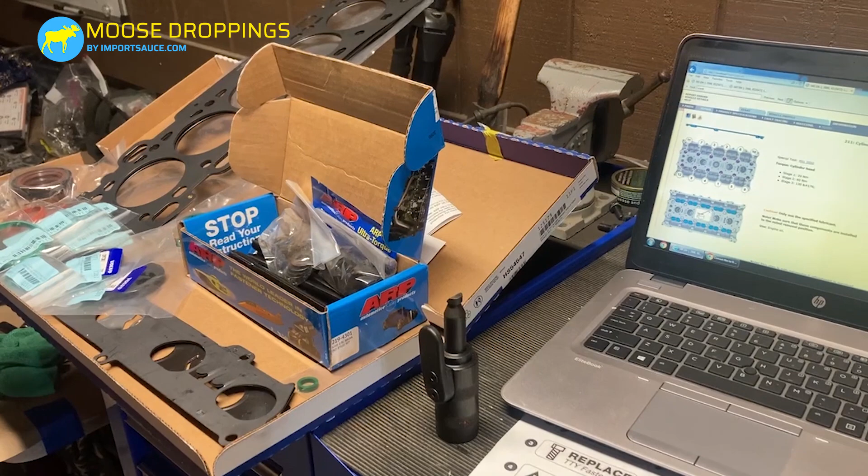It is now time for the cylinder head. Quick overview here: I have the procedure up, torque specs, and torquing sequence. We have the difference between Volvo and ARP, which we'll be using, plus the head gasket kit, which includes everything.

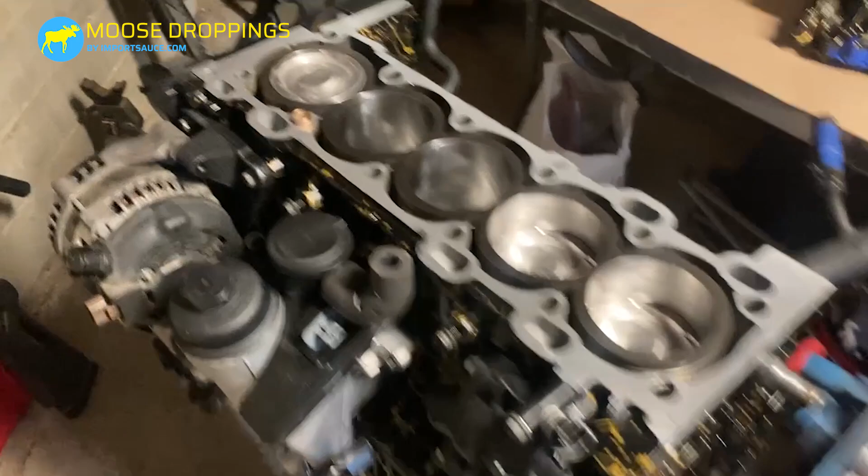So we're going to start off with this guy, which is going to go there, and this is going to flip over on top of it. Right now, since this is going to get closed in and we won't have much visibility down there on timing marks, we'll talk a whole bunch about timing later.

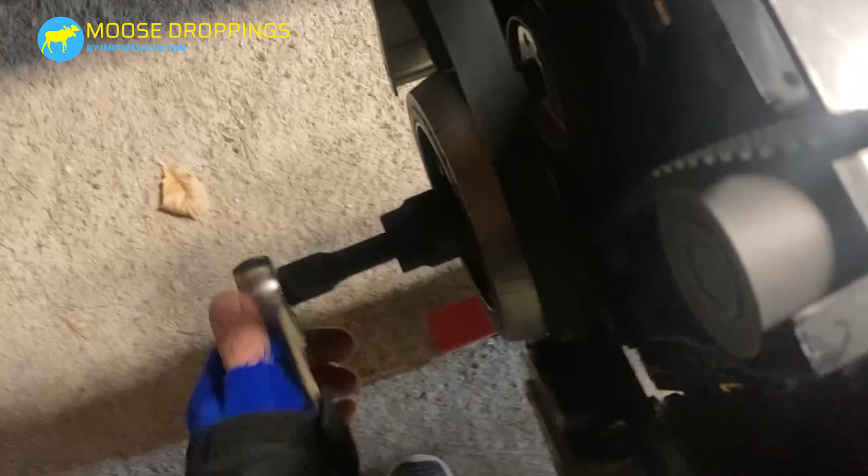But we are going to install the crank lock tool to make sure we are locked in at top dead center. So here's the tool. Easily enough, there is a little plug, and it comes right here. Open that up, slide this guy in, and then at that point try and turn the crank, get this seated up here, it locks.

Let me show you. It only locks one way, which is fine. If I'm going clockwise, it's going to move, but if I'm going counterclockwise, it will find it, and there it is—you'll hear it over on around cylinder 5 hit, and you know your top dead center. If you look down at your marks, I'll show you those later, you'll see those are lined up. We're just going to leave that tool in for now, and know we're getting close to timing, so let's keep it at top dead center.

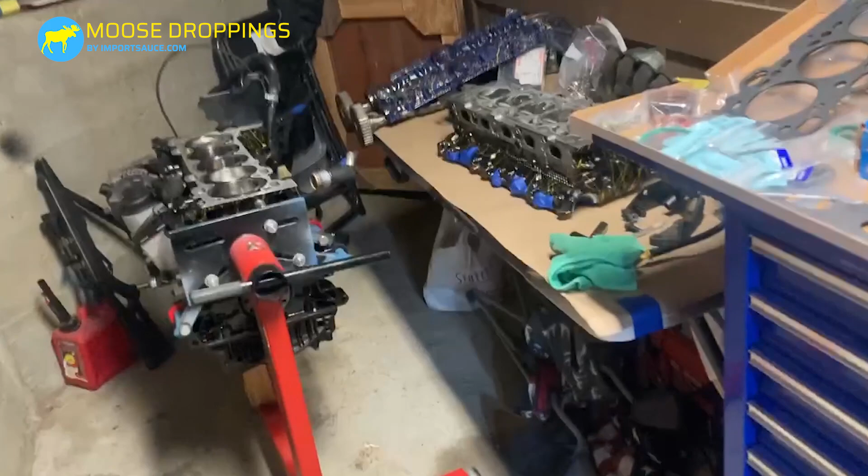Starting off, the surface has been cleaned and dried. The head gasket is going to go on. There is no sealant used on these, even on the box or the instructions—it's a dry install. Even Volvo says that too, not to use anything. Easily enough, when you look, make sure you see one that says 'top,' so that's facing the correct way.

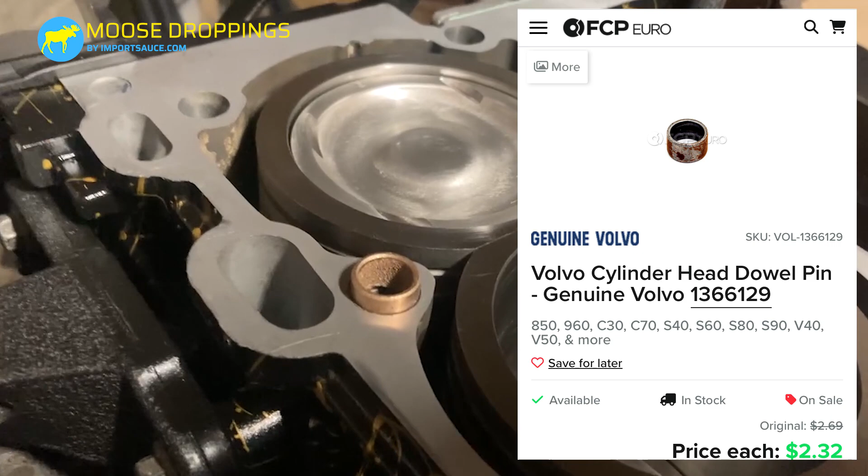One important note, we had to go source these locally. There are 2 guide pin or guide collar sleeves—one there, one here. When it came back from machining, we didn't have those, so we have new ones. We went down to the local parts store and they had some. Really that's to hold the gasket in place, right?

So theoretically at this point, we're ready for it. Make sure top is up, and it only goes one way. Everything is going to line up with the flow holes that you have. Then when I flip it over, the other one will seat into there. So we're going to flip this over on there, and I guess we're just going to get to torquing, right?

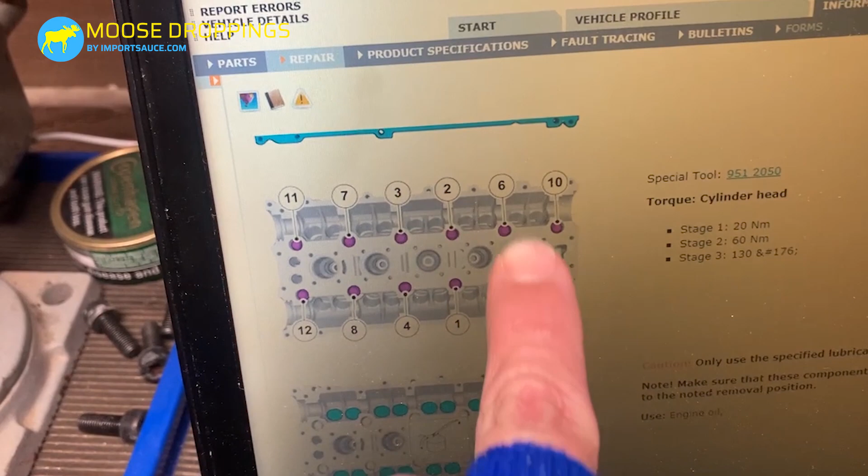Volvo or ARP says, hey, go ahead and just use the Volvo spec or sequence, and easily enough it's just kind of a circle: 1, 2, 3, 4, 5, 6, 7, 8, just like a big spiral all the way around. But it's going to be 3 steps. Stage 1, 20 Newton meters, which is about 15 foot-pounds. Stage 2, 60 Newton meters, 44 foot-pounds. Stage 3, 130 degrees.

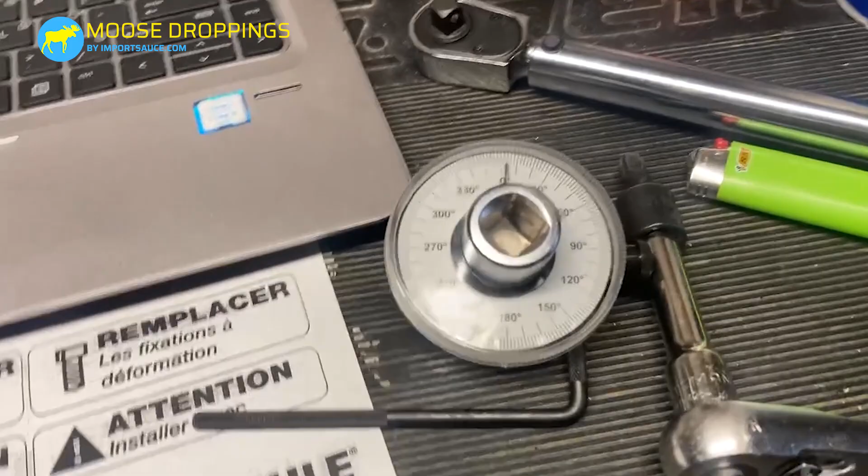So Volvo bolts are torque to yield. When we were doing the connecting rod bolts, you saw us using this tool, and that's how you would get to 130 degrees. 130 degrees is quite a bit. I remember when we did the head gasket a couple years back, it's scary getting that far up because you are waiting for that bolt to snap. It just feels like it.

But we're using ARP, so their sequence is simply, hey, just do it in 3 phases and make sure you end at 105 foot-pounds, easily enough. So probably what we'll do is 15, 44, and then take it up to 105.

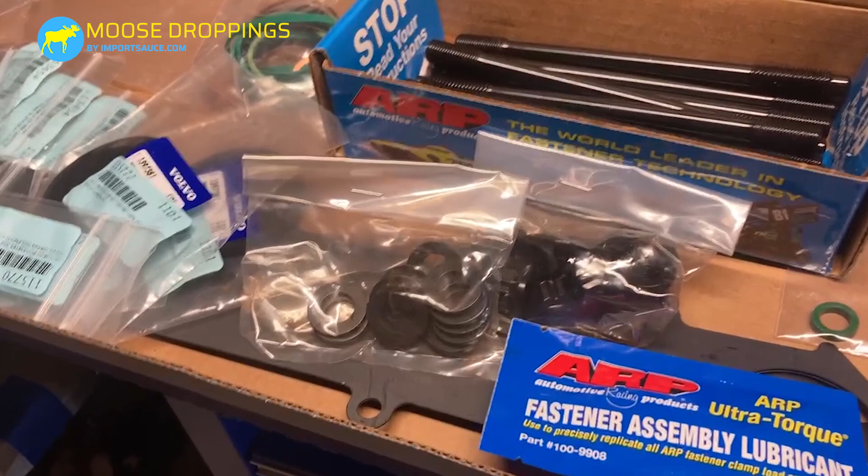Same thing—we're going to start first by threading these just like you saw on the block and the bedplate. We're going to make sure to put those in, clean them off, put them all in and out, just make sure there's no debris, and then wipe them down again. Then we will apply the fastener assembly lubrication, and hand tight with our Allen wrench to get those on. Then we'll drop the head on, and apply the goop on the washer, both sides, and on the nut as well, so we can get that going. Kind of a lot of steps, so we'll probably just give you some quick snippets as we go into it.

Step one, we went ahead and cleaned this bolt, and what we're doing is just threading it in, hand tight, making sure all those threads are good. Yep, perfect.

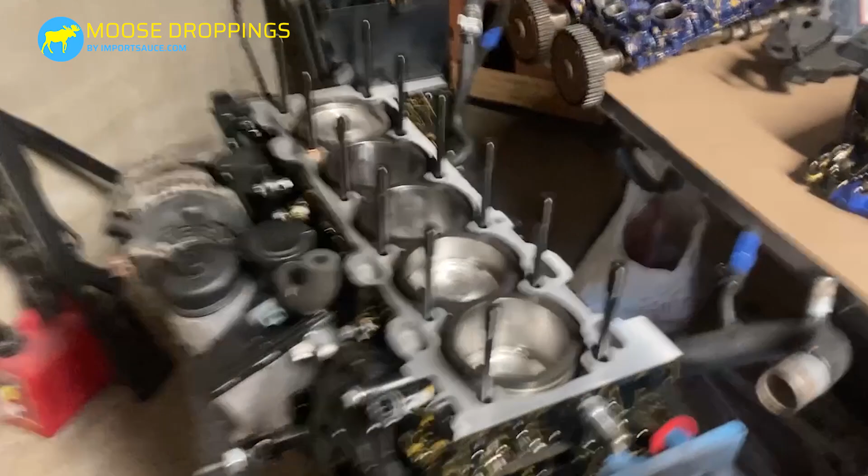All of those threaded down, everything looked good, came out, wiped all the bolts off, got all the debris from the cardboard box. Everything is hand tight with the 6mm Allen. Let's go ahead and start getting this guy down, right over those. Gotta kind of play with it a little bit. Let's go, guys.

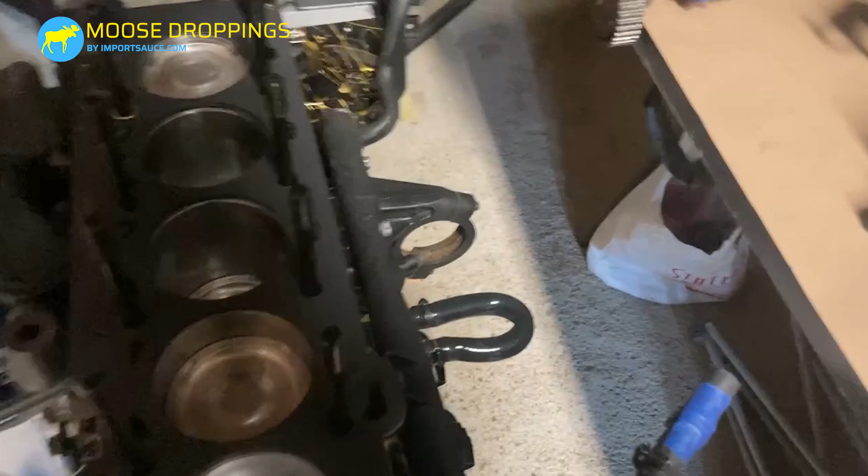There we are, okay, so that dropped on, guide pin, everything is good there. I may pull that guide pin out and put them back over here, just so that it doesn't shift that around. Really it's just to hold the gasket, and once that's in, this gasket should be perfect. So I'll do that, and then I'm going to pick up this head and flip it over and put it onto there. Okay, so that dropped in just right. Almost zero gap there, so we know that just the weight of it has pretty much gotten where it needs to be.

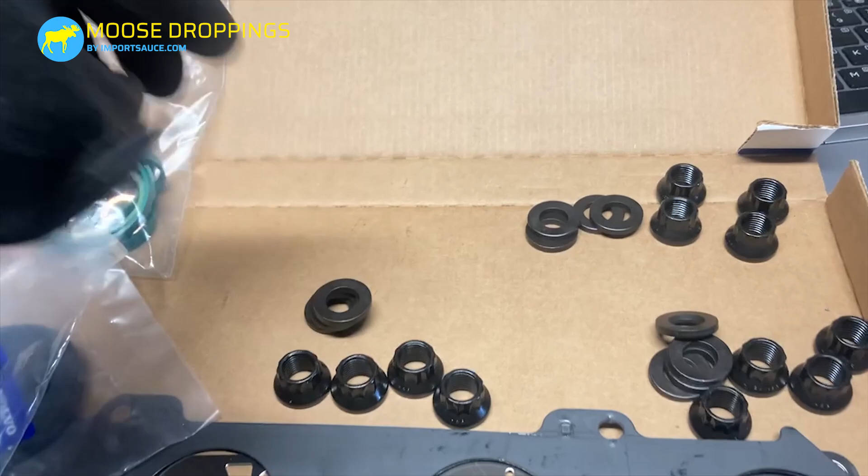The instructions are to lubricate the threads and lubricate each side of the washer and then put those in. This is gonna be a little difficult, right? Because the hole is a little tough. So luckily, pretty much everywhere there's a hole, there's some passages where we can try to get our finger in there and finagle and do what we have to seat that washer, and then also seat this. I didn't even look—that looks like a 14, oh sorry, 14, so 12 point.

So we're going to do that. We're going to lube inside threads. We'll get our finger and put a little, then wipe it in there to try to get some of the threads there as well, as it says, both sides of the washer. And then we will do hand tight on them, and here we will start the torque sequence as well. So after hand tight's done.

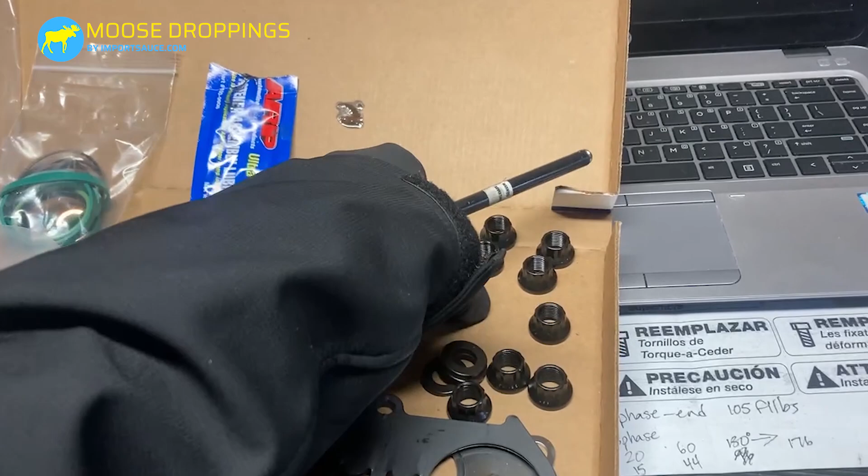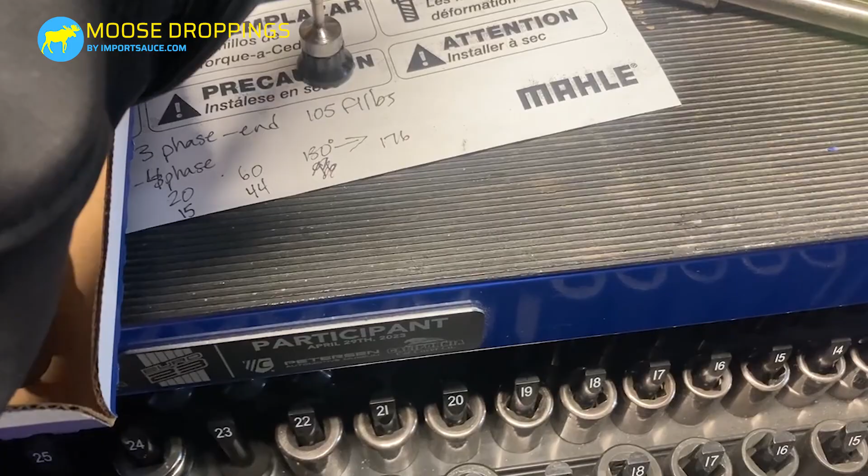What we found to work is after it's ready to go, you take a magnet, and then you can drop it down into the hole and just stick your finger through there and hold it in place. Same thing, after we lube up the nut, we would do the same thing, in which we would put it pretty much dead center, and we were able to drop this straight down, get a few turns, pull it up, and then stick the 14 mil down there and just go hand tight. So it's a slow and tedious process, but so has been this entire thing.

So that's kind of the best process. Lube everything up, and we were able to put a little bit on our fingers. For example, for this one here, we would just stick our finger down, and you can see, to rub some on the threads there. So we'll see you in a bit after we get all these suited up and ready for torque sequence.

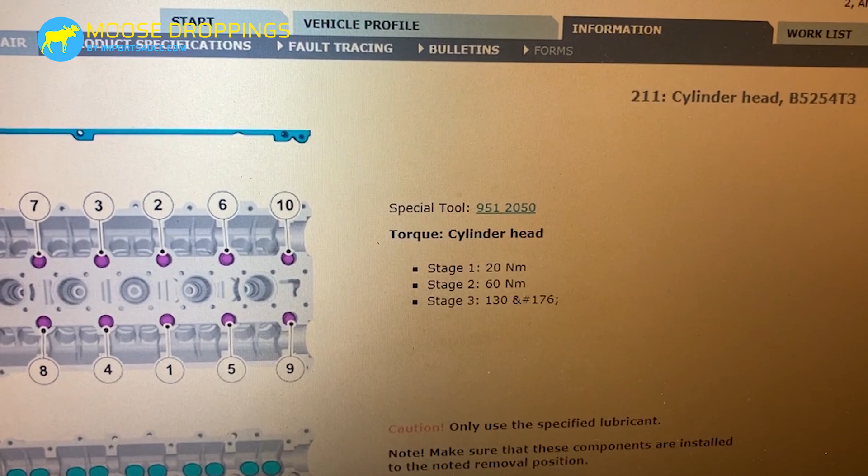It took about 30 minutes to get all those fished in, but we are ready now. Everything is hand tight, everything was lubed up. And again, the Volvo specs in tightening sequence, we're just gonna do the swirl around. If it was Volvo spec it'd be 20 Newton meters, 60 Newton meters, 130 degrees. But since we're doing ARP and they're not stretch bolts, we're going to go 25, 50, and end at 105. So we're gonna do 3 rounds of torque there, and then I guess we'll just let you know when it's done.

Okay, that is done. That was a workout.

105 is quite a bit. I had to brace the stand, and the thing was moving and grooving.

So we got it. What are we going to attack next? I don't know, there's not much left on the table. Maybe pull those tappets out, clean them one by one, get any debris out of there, and just start laying stuff in and seeing how it looks.

Every tappet was pulled. They were already numbered to keep them in order. The next thing, they were pulled out, wiped down of any dust they had, and then I did a little pre-oil with our Lucas Break-In Zinc Plus, just to get a good coat on there.

I'm going to go ahead and do a final wipe down across here, and then we're going to start looking at putting some of these gaskets in. Same as always, I'll put a little bit of oil, rub it around just so they're not going in dry, and I'll show you what gaskets go in and where they go.

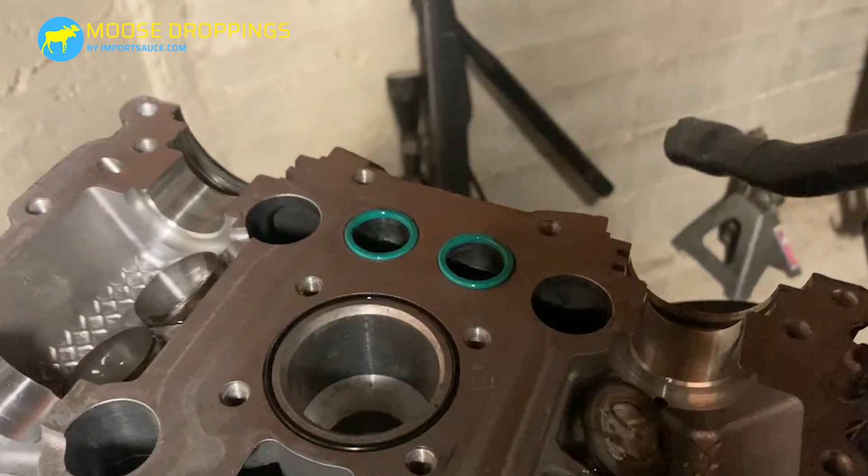Okay, so we were actually only able to load up 7 gaskets. It's going to be 1, 2, 3, 4, 5 - the little black guys around the spark plug housing where that's going to meet up. And then these 2 here, which are for the VVT. If you have a 2.4i, I don't think you need that - I think you just have 1 on there. And then what's left over, let's take a look and see.

We have 2 more VVTs, same gasket, but that's going to notch in there - VVT cam position sensors, right? So 2 more go in there.

And then we have 5 of those big orange guys - those are for the intake manifold, or the plenum as they call it, where it's going to meet up with the lower intake manifold. Then they gave us 1 big green one, which meets up from the throttle body to the intake manifold as well. A couple of crush washers - those are going to be for the turbo oil feeds, but because we got new hoses and upgraded elevate lines and all that, we have new crush washers already installed.

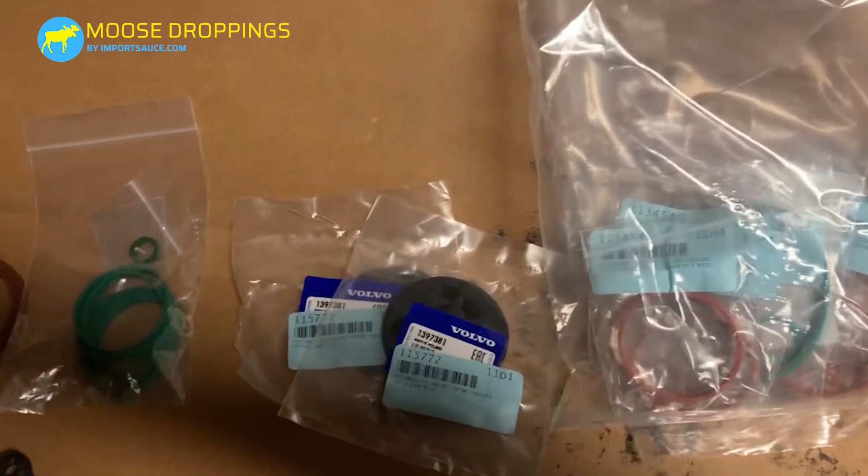So this is what we know we're going to use. Obviously, the 2 back caps, which are going to go here and seal the back of that. And for some reason, they sent us 2 different cam gear seals, right? So that's those guys right there, which will notch in here.

The black ones are a little bit smaller diameter, and these orange ones appear to be the ones we will use. We can take a close look because it has the part numbers on them. And obviously, one's smaller than the other.

So my thought is maybe this whole kit - it doesn't tell you what's in there, unless it's a Volvo part number, then you can look that up. But these guys are just in a bag. My guess is maybe the 2.4i uses the same kit with a smaller diameter, or just something. A lot of these aren't used.

I still have no idea what those extra guys are for. I don't see anywhere where they would go, which is not uncommon, because I know the last time we did the head gasket, we had a whole bunch of extra stuff after the fact. So we're just making sure and checking everything as we build it up. But essentially those gaskets are done.

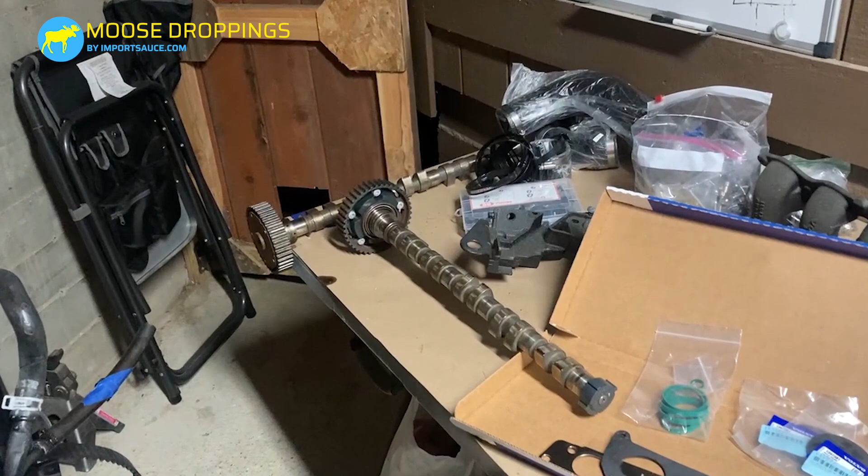So what we're going to do is wipe down the cam gears, and then we'll go ahead and put a little bit of oil on them. And we are going to install those new guys. We're actually going to be pulling the cam gears off to do some painting, but while it's off, this is really easy.

You can just slide them out. But we'll also show you the procedure when we pull the cam gears off, if there's access to do it there. Yeah, we're just going to pull these off, clean these up, and set them down.

Again, intake and exhaust are marked, and we've already pre-oiled, dropping a whole bunch on there on the top, just so that when we mate that and start crunching everything down, we're good to go.

Here is where we're at. We have both brand new seals on there after cleaning these, and then we just drizzle a whole bunch of oil on them, get them kind of juiced up, and we'll do that again right before we set this on.

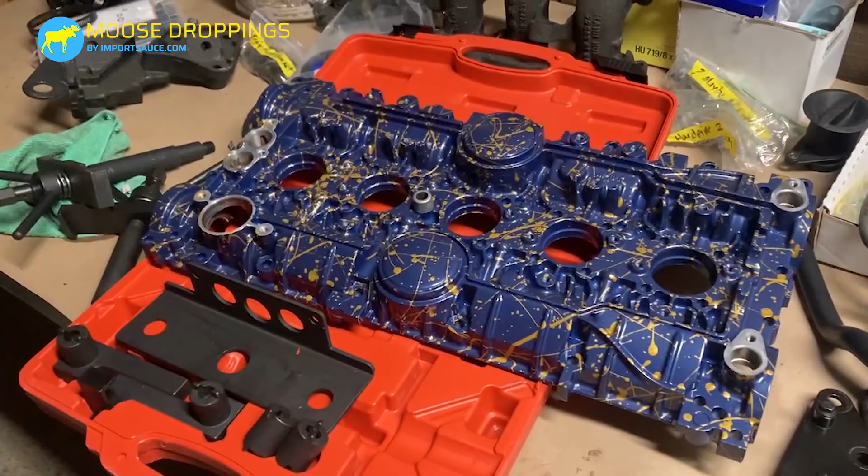We came over here and set the timing, and what we're going to do, if you've seen the notches, they're extremely small, so we've grinded those out so you can actually see them. This one we have not.

Let me get a flashlight. We marked it with red Sharpie, because we need to get another Dremel cutting bit, but it's so dang small, right? I mean, you can see it's just a teensy mark.

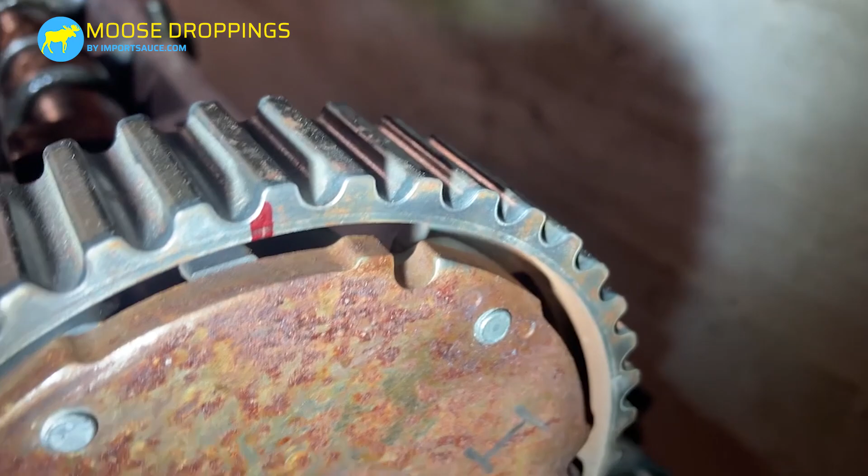And so we've set both of those almost to about 12 o'clock, right where they would be. We know the bottom is dialed in and locked in position. But obviously, we're going to do a whole section on the timing and show you everything there.

The next step is going to be pulling these out, getting them out of the way, and going ahead and getting our anaerobic sealer on this whole thing. Then we're going to put that on, and then we are going to use our timing cover clamping tool, which is going to evenly disperse the pressure and push that down, so that we can get our 46 M7 by 35s all on there.

There's no torque sequence on that, but as we saw in VIDA way back, if it doesn't say it, then we'll just start from the inside and work out. This process takes a very long time, 46 of those. And we're going to have to figure out how to be careful and not kind of eat into the paint, whether we should dab just a little bit of oil underneath the flange or what.

I don't think the torque is too high, maybe 12, 15 pounds. So that's not going to be too bad, but we don't want to start tearing up this paint. We've got a lot of clear on it, so hopefully that should mitigate that. But yeah, we'll pick up on that tomorrow, which is essentially pulling these out of the way, and then doing another final cleaning on the surface there.

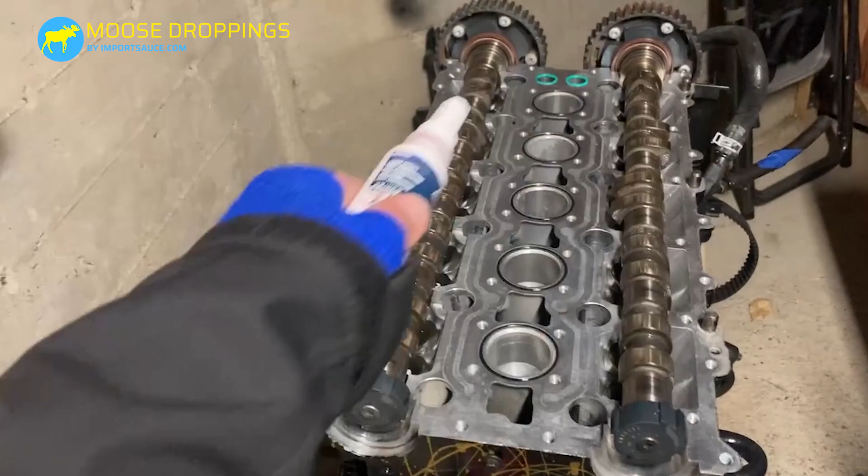And then at that point, get our Volvo anaerobic sealer all on there, get that cover on, clamp it down, and torque all 46 of those. And when we do that tomorrow, you will get to see some of the new Elevate hardware, titanium 12-point hardware that is used for this, which is going to include the 46 timing cover bolts, bolts for the oil filler.

Hardware that holds down the VVT, pretty much everything on here. Elevate has a brand new kit that came out in perfect timing for us. So we'll pick back up on that tomorrow, but for you, that'll just be about 3 seconds from now.

Don't know quite where we left off last night. I think the cam gears were on and oiled. We pulled them off just so that we can apply our Volvo anaerobic sealer.

For this one, I'm actually going to use the paintbrush or paint roller style method. For the oil pan, where it's just a single bead that goes around the outside, not a big deal. But considering this entire surface has to be covered, I do see the value in it. I did not do the Volvo special tool, I just got a regular paintbrush roller that we had.

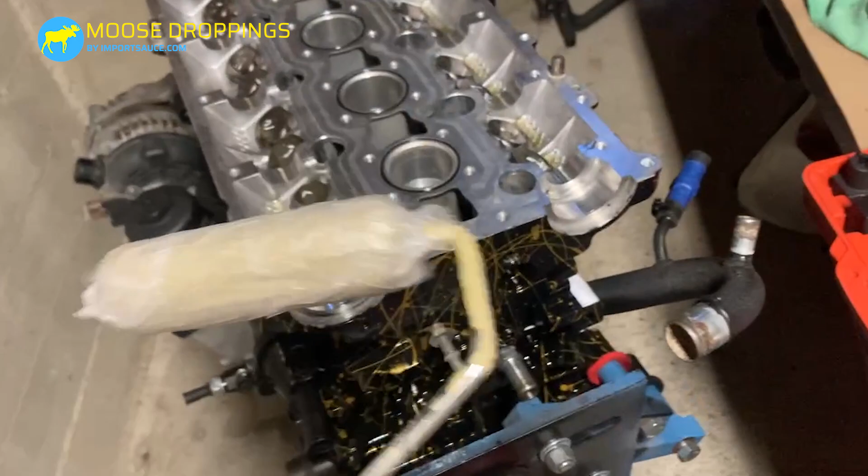Rather than using a regular painting brush, because we made this mistake with our head gasket years and years ago, when we rolled it, all of our sealer got sucked up into the brush and we barely had enough to squeeze out to make it seal. And these things are like 50 bucks a tube. So what I did is I wrapped it in just saran wrap, press and seal. That way it's going to roll it and evenly distribute it, but it's not going to soak up any of the product, to make sure as much of it stays on here as possible.

So we're going to give it a final wipe down, because you can see in certain areas, moving the cam gears around, we got a little bit of oil on there. We're going to leave those two gaskets in there. We could pull them out, but either way they're going to get juiced up. So, well, maybe we'll pull them out.

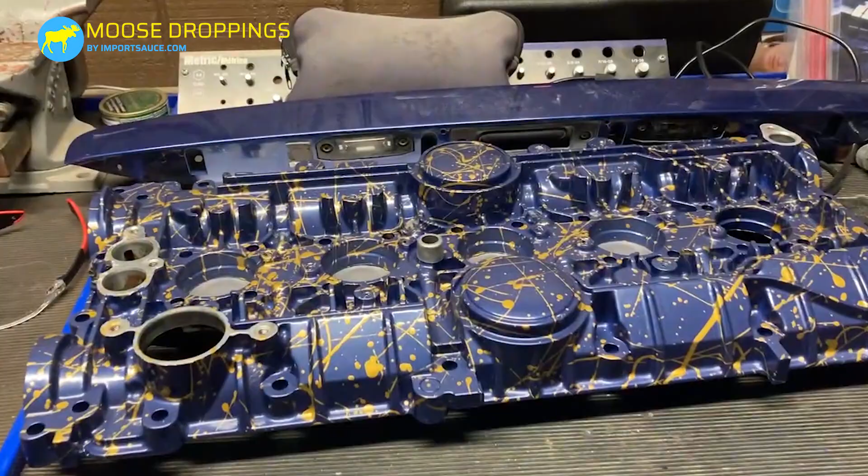We'll roll it on just so you can see that. We'll drop those back in, and then we'll drop this guy on. And then we've already kind of tested this out. This is the cam locking tool, but you can buy one for a little bit more that has these guys that will actually screw into 1 and 5 and clamp the whole thing down so that you can evenly get torque, and that way everything is completely, almost pretty much sealed on there.

And then you just go through and tighten everything. That is not necessary. When we did the head gasket, we did it without it, and we just started, as Volvo says, from the inside, working out, making sure everything is torqued, and that was enough to press it down as well. But this tool does it all at once and just kind of clamps it down.

It should be noted that once the timing cover is on, you can still turn the cam gears. But when we do set them back in, we'll make sure they're set as close to top dead center as we can eyeball it, just so they're in the right position. Then as we start clamping it out here, we will pop the two end caps in as well, so that when it clamps down, they're sandwiched in there nice and tight, rather than trying to pop them in after the fact.

Or actually, cancel that—we're not going to put them in, because when we do a whole timing segment and show you everything on timing, we want to show you some of the things that go on there, like how to use the cam locking tool, how to look for what you're looking for inside, and all of that. So those will go on later. Right now we'll clean this up and coat some sealer.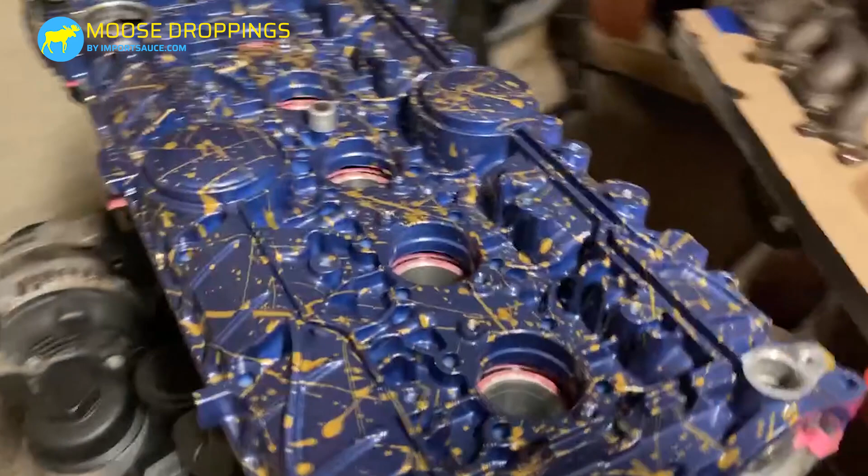What we're going to do now is get some old rags, because this is going to clamp down and we do not want it clamping down on our paint job. So we'll get some rags and start torquing that down. Even though the instructions in Volvo VIDA say cylinder 1 and 5, I've heard from a few other Volvo buddies who have done a lot of engine work, Volvo gurus out there, and they say go with cylinder 2 and 4.

It's going to disperse the clamp a little bit better, so we're going to show you what that looks like. Essentially, you'll turn this by hand and thread it down into the spark plug hole. Once it's there, you can go ahead and start spinning it, and that will bring everything together. We'll get some protection for our paint job and then get those suited up.

The clamp tool installed easily enough, and you can see it has sealed up all the gaps. All that pink showing is just where the timing cover is smaller than the head. Once we clamp everything down, we'll go ahead and wipe all that off so we don't have pink stuff there. We'll work quickly because it's kind of like glue—maybe after it dries we can razor blade it or something. But yeah, that thing just clamps everything down.

Now we're going to get our M7 by 35 millimeters, and this is the brand new Elevate titanium 12-point set we're featuring here. It just came up on their website, available for purchase. This is the kit you should buy if you are not using the plastic timing cover, which leaves all 46 bolts exposed, plus a few other cool ones in that Elevate bundle.

So here is the Elevate titanium M7 by 35 spec that goes over the entire timing cover. Let me show you on VIDA—if you're looking at the timing cover, all those little purple dots, 46 of them. And here they are, brand new titanium 12-point, exactly to Volvo spec, minus the fact that they are stronger, lighter, and look a heck of a lot better.

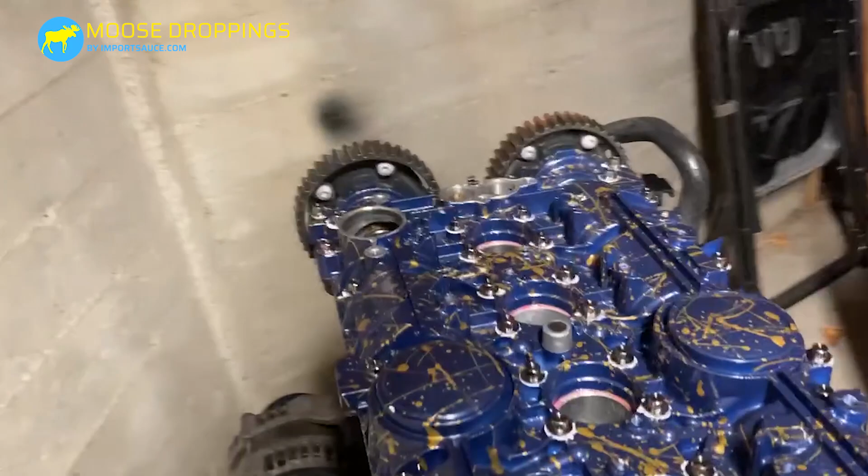I've been really excited to get to this step in the project so we can actually put these guys on. So we're going to suit these up. Here we are—all 46 are on there, the new Elevate titanium 12-points, looking good. Let's see if we can get a close up. Yep, so 46 of them.

One thing we did do is torque everything inside out. We could see everything juicing out, and we wiped that away, but you can see the juice there, and I did a quick check—yep, metal to metal, clean seam. You can't even barely see the seam there. I'll wipe a little more of that excess away, but a good sign is seeing it kind of juicing out as it sandwiched down, so you know it got a good mating.

We went ahead and stuck the spark plugs in just as we were working. I knew it was going to happen—I didn't know how to avoid it without buying bolts that have washers that spin on them. With the turning and torquing, we were going to lose some paint on our paint job. But the good thing is the base coat white primer that we used did hold.

And with the paint splatter, you can't really see it, right? So if you're looking, your eyes aren't drawn to it. We got lucky there. Spark plugs went in with lots of anti-seize on them, and the torque spec for that was 21.8 pounds—we just did 22.

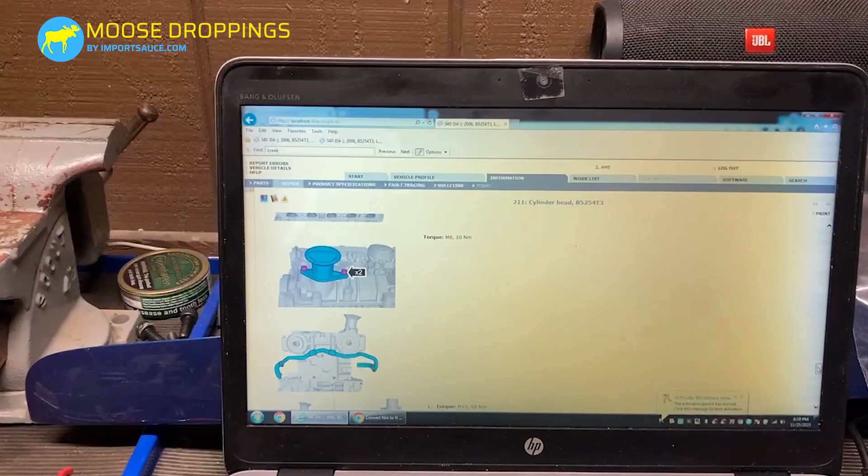The next thing we're going to do is just continue on. We were kind of doing our own thing, but we'll finish up everything VIDA says to do on the timing cover.

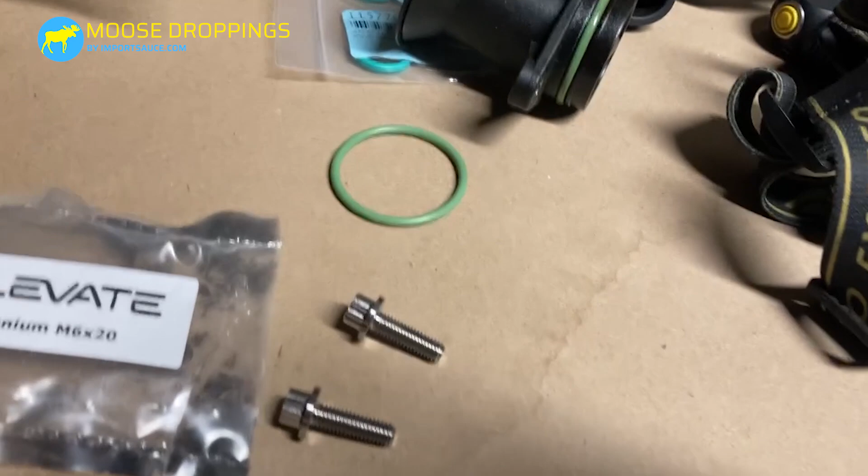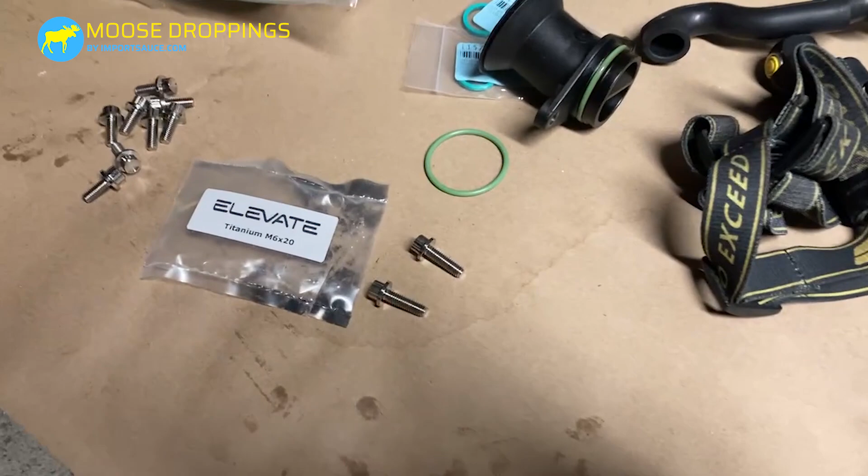So the next thing we're going to do is the oil filler cap, and there's a new rubber O-ring that came in our head kit. Just like the Elevate 12-points, the kit that's not using the plastic cover comes with two M6x20s that match, and those hold that down. Also, since we're not using the cover, there are 8 M6x15s which fill the holes where your plastic cover would bolt onto. So we're going to put the new O-ring on, clamp it down to 10 Newton meters, and then put our 8 plug holes in as well.

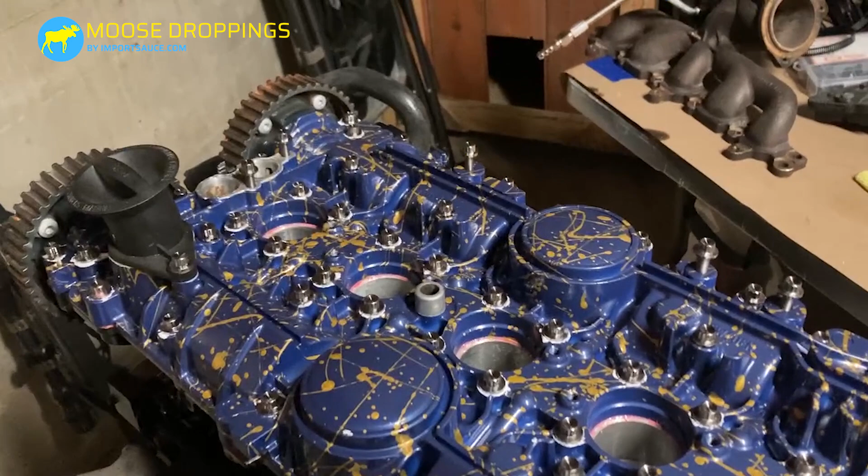I also forgot to mention, after we put those 8 cap fillers in, that the bundle you select for not using your timing cover also comes with a titanium 12-point replacement for pretty much every single hole on this, with the exception of 7 or 8, and we'll talk about that later on in the construction here.

But it comes with our 2 VVT bolts, it comes with our 2 cam position sensor bolts, and plugs for the 2-4 and some other variations. These holes are used for brackets and things of that nature, but it comes with things to plug that up as well. So really the only thing we do not see here with the brand new 12-point titanium from Elevate is going to be a few of the grounds, including the coil packs. And we know there's a ground there, and a couple in here for the wire harness mixed in with the coil pack bolts, so we'll talk about that later on. You definitely want to stick around and keep your ears peeled on what's going on there.

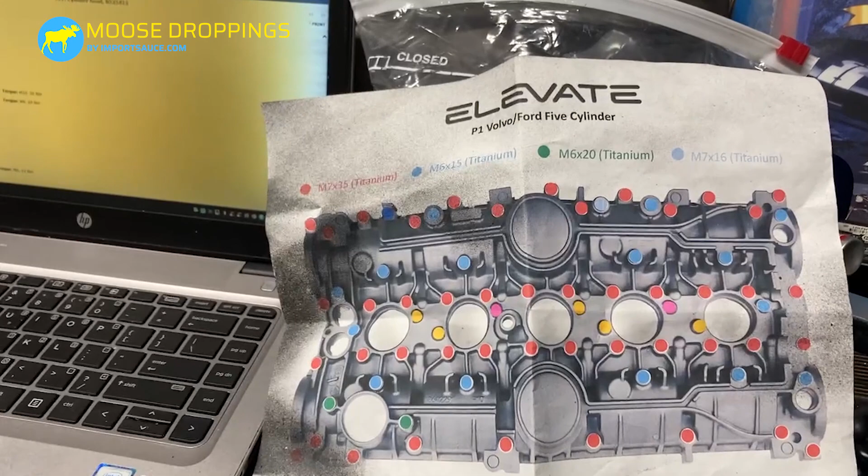Elevate comes with, as always, full color, color coordinated instructions, and it tells you here is what goes where, and here are the different sizes that you should be putting here and there.

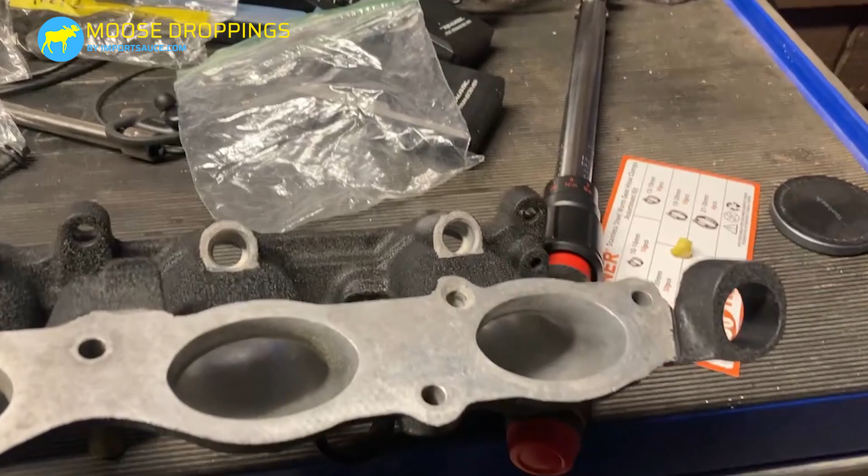Next, we are going to put the lower inlet manifold on. This is the Elevate lower inlet manifold, and it looks like a Volvo lower inlet manifold. That's because when you order yours, you send yours in for a core. We have a whole video on this, but they go ahead and do a nice shiny polish out, extraction of all that material in there, and get this thing ready for performance.

There are 2 gaskets that came in our head gasket kit. Easily enough, it's going to be the black one. This one is going to be for the exhaust manifold, so we'll just toss that over there. The holes only line up one way, so you'll figure that out pretty quickly. There are 6 M7 bolts, which means we are going to be at 12.5 foot-pounds of torque.

As soon as I put that on, fuel rail bolts, I am just going to drop those in where they go, which are just 2. 1, 2. Because the fuel rail is still attached to the fuel system in the vehicle.

But I did notice that I remember last time when I was tightening one that it was giving me some trouble, and it looks like it's because it's bent. So I'm going to see if I can track down a replacement. I'll just thread a few in there to keep it in place, but I'm going to put it on my notes to see if I can go get a replacement for that. That looks like an M6 something, so we'll see—the local parts store should have something for that.

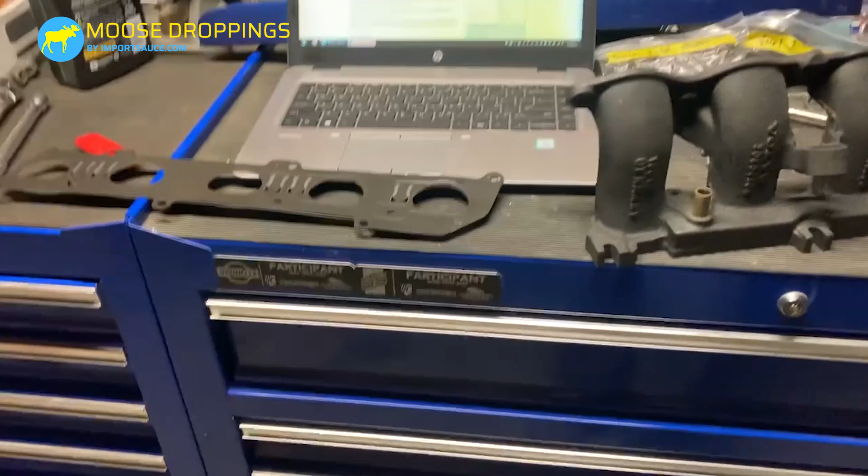So we're going to put that gasket on, and we will torque those 6 bolts to 12.5, and you'll see it here in a bit.

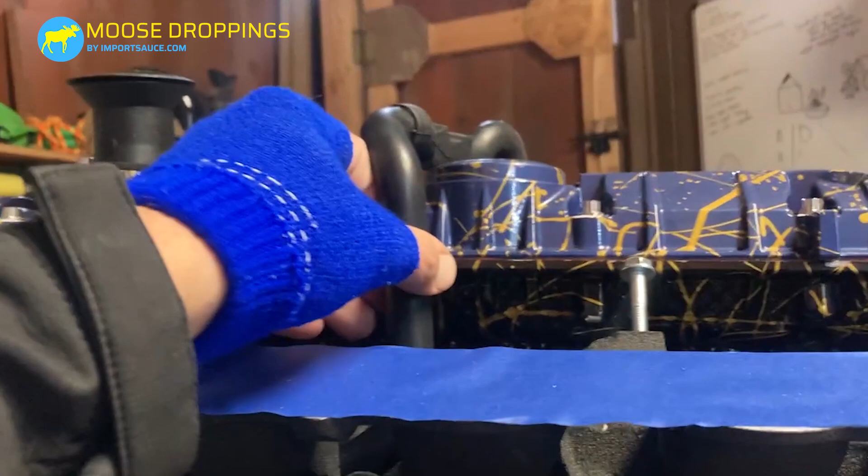Now that we have the lower intake manifold on, we can route this breather hose. This end goes right there, it'll loop down through that hole, and then it will bend over and go right there. You'll notice there's a little notch or indentation there, and that will line up with the notch indentation here where your plastic timing cover sits. So really, all we're going to do is fish that in like that, make sure it's in the area down there, and come down here and push that down—okay, all the way flush. So it goes up, follows that curve, comes up here, and we'll put that on. That's all the way flush, and then this kind of wedges in there. You can pull it and shape it how you need, and that guy is all set.

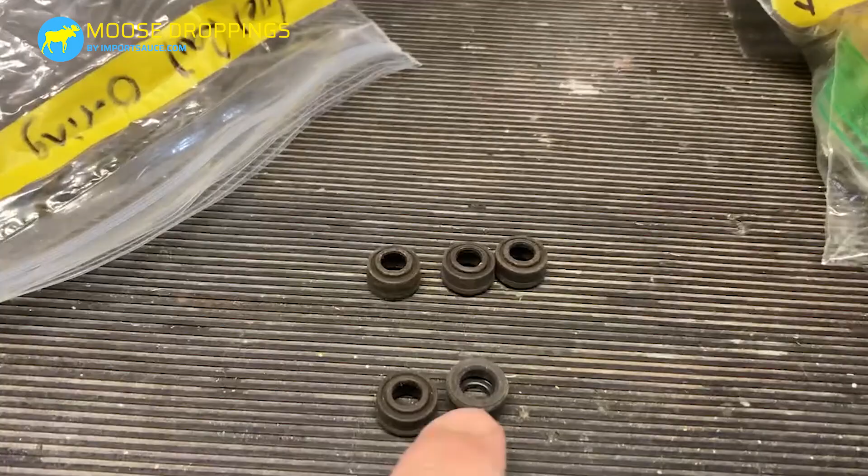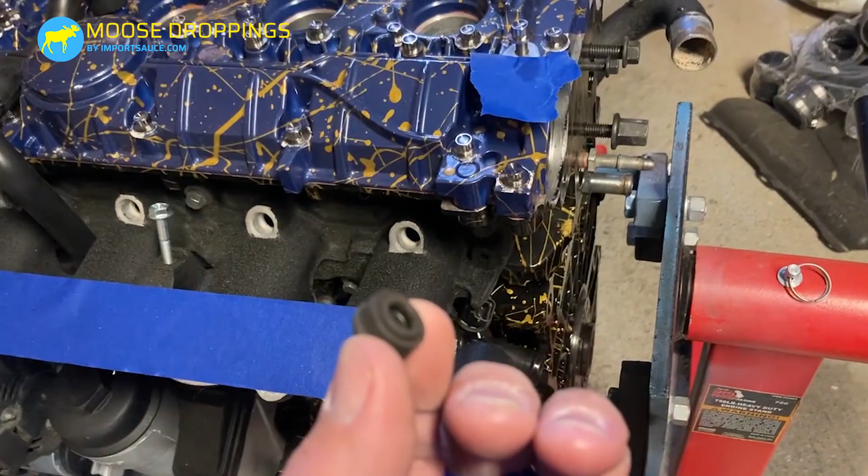Next thing we want to do is 5 O-rings for the fuel rail. So we have those right here, and we'll go ahead and pop those in. Important directional note on these: there are 2 sides, a flat side which is just a smidge bigger in diameter, and a shorter side that has a recess or a little elevated spot on there. The side that has the little raised hollow sleeve is going to go down like that into place, because we can see there's a little lip there, and the little groove on there is going to seat inside of that. So we'll clean these up with a little wipe down, and stick them in.

Next up is our VVT solenoids. They look the same, but they are different. If you look underneath the Volvo part, you'll see the part number 312-16222. Come over here, we can see it is, it's kind of there, 312-16221.

221 is the intake side, 222 is the exhaust side. Lower number comes first, and on the engine, the intake starts the process: air in, exhaust out. So lower number on the intake side.

Same thing applies as a side note for the other ends, on the camshaft part numbers, if you're wondering which one is which: ending in 9.7 is the intake side, ending in 9.8 is the exhaust side.

So similarly, we are going to take these. We are not using the old hardware because we have the new Elevate 12-point. We're going to go ahead and pop those in. We have new seals for those as well, just like the seals already in there that will seat the bottom. Pop those on, and we'll torque those down as well.

We have talked about this breather hose a few times, and we've recorded it a few times, and now I have to show you actually how you do it, right?

So we had already put the motor mount bracket on, and earlier we said we'll wait until the lower inlet manifold is on so it has something to hook up to, or maybe we'll wait till the turbo's on so we can plug it in here.

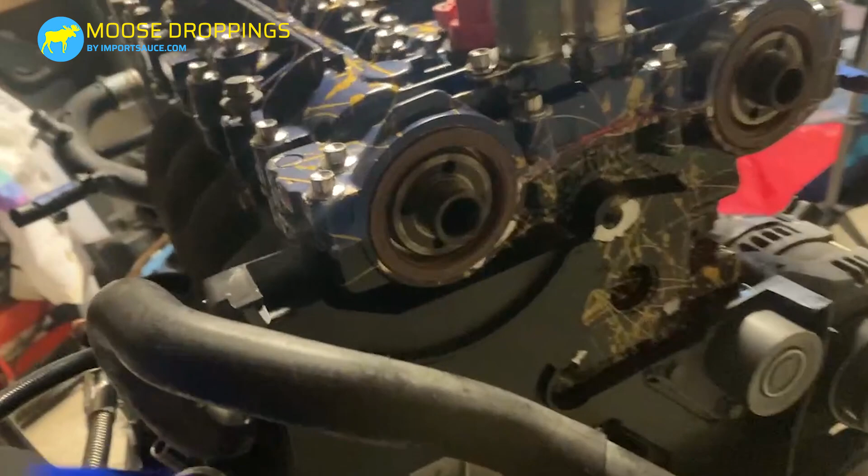The problem is, maybe even before we put this cap on, I don't know, this might have to come off as well. The tube fishes and sits inside this groove behind the cam gear.

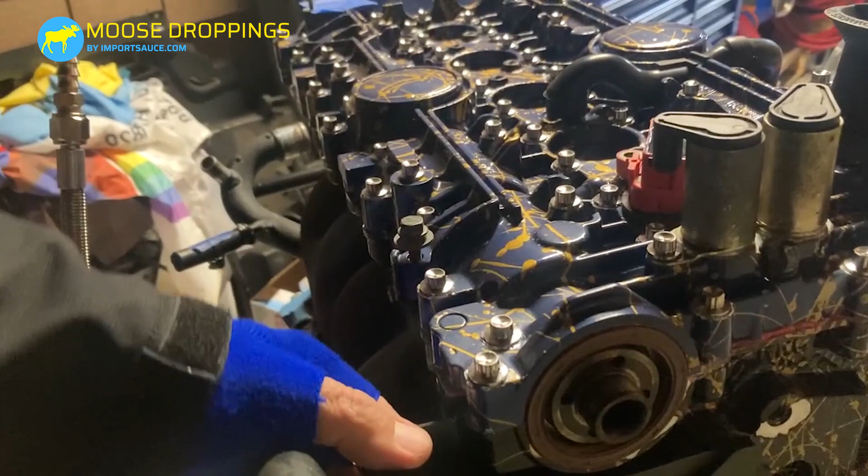The time to put that hose on is before you put the head on, because you're wide open and it's just going to sit in here on this notch. We'll see if we can get it on with this, but it goes kind of back behind all of this as well. So if we can't fish it, we might have to pull this cover off.

So yeah, anything we said regarding that hose, ignore that, and you want to put that thing on before the head and the cam gears and any of this stuff goes on, even if it's just sitting in there waiting for everything else. So we're going to go ahead and fish that in, put our motor mount back on, and then since the lower inlet manifold is torqued down, we'll hook it up there, and then we'll come back and talk about the last few things.

Turbo's just sitting in there, two bolts, but we'll walk you through that and some other things.

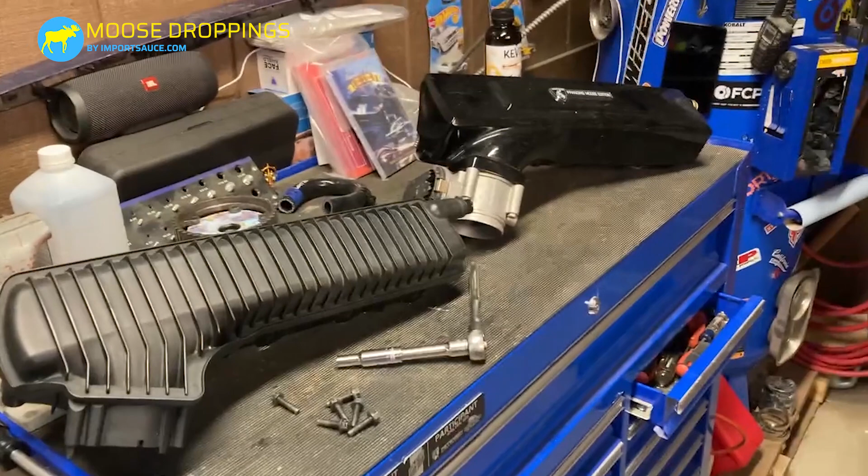Next up is the installation of the intake plenum upper onto the lower. We've gotten very lucky, and at the end of this build, actually right now, our California smog check is due. So that includes a very strict visual inspection.

So we have our plastic covers that we haven't run in years that are going to cover that up, and we have the stock intake box and turbo charge pipe, and hopefully most of this paint will be covered up, but paint and cool stuff like that is not against the smog check rules.

But when they are looking, they do a visual, and if they see a nice Elevate intake on there and such, they're going to be suspect to maybe look a little deeper. So for now, we're going to put the stock parts back on. There's no point in putting this on, firing it up, and then the next day taking it off.

It's not super difficult, but the screws or bolts there actually come in from the bottom. So it's not terrible, but it's definitely easier to just do it now while it's out of the car, and then it'll be fun if I pass smog, like I got new parts for Christmas, you know. It'll be like, oh hey, there's an extra horsepower boost.

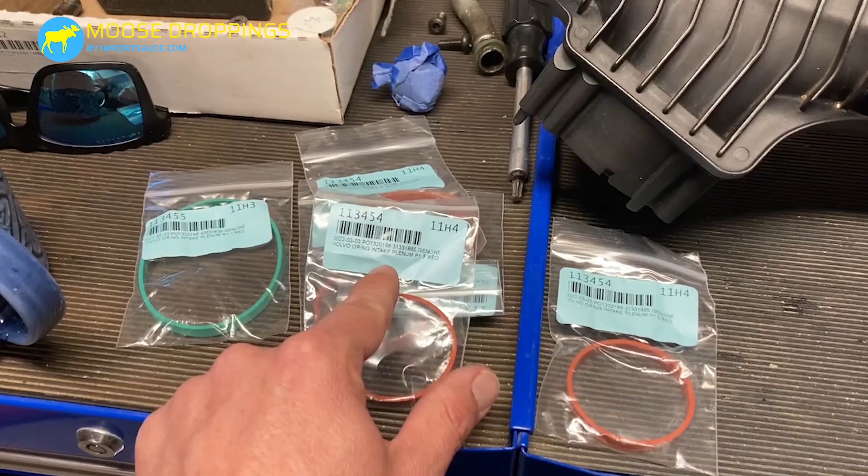So in the head gasket kit, we have 5 new gaskets for the intake plenum. As it says, 5 required. That is those guys right there, so we're going to swap those out. Total of 6 M6 bolts. We already know the torque spec on M6, we've been talking about that forever.

And when we go to do the Elevate install, it actually includes their own gasket that they send, and I also think that's available on their website just as a standalone part.

We're going to swap over this to this. We're not going to detail that, because assuming that you're putting your engine back together, your intake throttle body is on whichever piece that you took it off of.

This is the oversized one that bolts right up. I think it's like Porsche or something. Everybody has a write-up on that.

I do remember, I think with the Elevate, it came with separate hardware, so I'm going to have to track that down. It may be shorter, I think, but we'll see. I'll track that down at the hardware store.

So essentially what we're going to do is swap these 5 in there. There are little guide pins which will help you set that on, and it will line up perfectly. Then we will just torque down with our M6 spec there. We'll show you what that looks like.

Next up is installing the turbo manifold, turbo, onto the back of the head. We had done this about 2 weeks ago. We had to scrap all the video and kind of start fresh, and it's all due to this.

Let's see if we can get it here. This turbo return line, oil line. That goes from the bottom of the turbo and drops into the block. It's connected by 2 T27s.

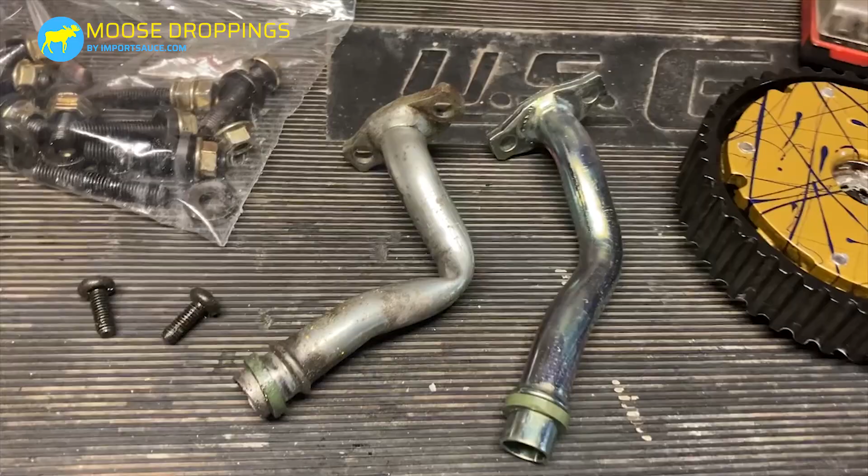A fresh gasket, which goes up here, fresh gasket on the bottom. So you can see the hole where it goes in there, and then where it links up on the turbo, you can kind of see that white line right there is just where the gasket is sitting.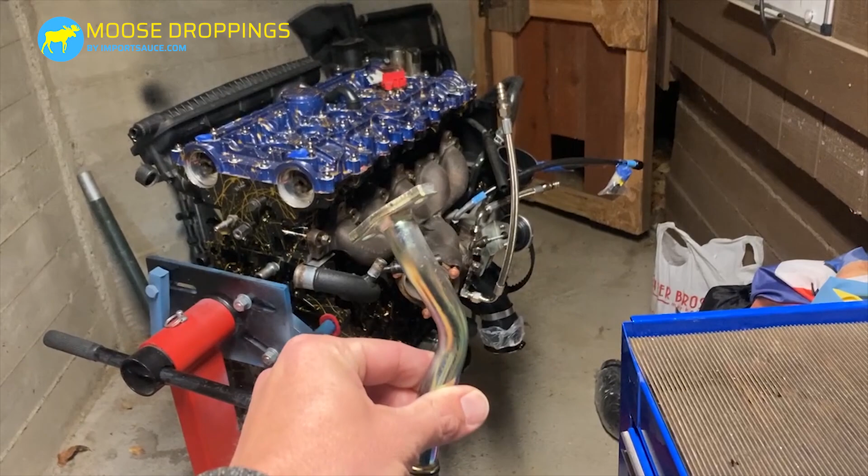When you're pulling the turbo off, you can't pull the whole thing up because the top of the turbo there, or the exhaust manifold, is going to hit the head. So you have to back it out and then bring it out at an angle. Problem is, when you do that, this has enough of a seat that when you pull it out, it's going to kind of bend and mess up the bottom there.

And we kind of saw some of that there, and we knew there was a bend in the tube. I mean, this obviously is really far gone, but we just assumed that the bend on it was what was there before.

As we were trying to put it in, we were trying to seat this tube while it was still installed. We were like, let's slide this in and then cock it forward. But because when pulling it off it was already bent, it wouldn't line up. We were having some issues, couldn't figure it out, and as we were trying to finagle it is when we pinched it even more.

So special order, the dealer does not have these sitting on the shelf. It didn't take long though, they got it next day, but we live an hour from the closest dealer. We didn't want to take the journey, so we said go ahead and ship it to us. So it made its way up here.

So what we're going to do is seat the pipe in first, and then seat the exhaust manifold. It's on there, but just pretend it's not. Once both of them are seated and kind of loose, before we torque anything down on the exhaust mani, we will then mate this up to the turbo so that everything is where it should be, and then tighten it together.

Putting it on as one piece with the tube on, I don't see that you're going to get lucky enough and not damage it. I would even argue that if you do pull the turbo off for some reason while it's in the car, to take a look, maybe just have one of these on hand.

It does not come with the gasket. You can order that separately. Luckily, our head gasket kit came with a whole pile of those. So that's what we're going to do.

The other note is all of the hardware. So what we had done, and we've already done all this, is we took a cleaning tap and went through all of the holes in there, and made sure everything was cleaned out and ready to go, and that the hardware is nice and fresh. We've already spent a couple hours doing that, so now it shouldn't take us too long to get this thing bolted up.

We'll show you what it looks like when it's done. It's going to be pretty much similar. The only difference is it'll have more than 2 bolts just kind of hanging and sitting there on it. And these, I don't remember, I'll tell you what they are after we're done, but I think they were like 12 or 13 mil.

Exhaust manifold is on, and the turbo pipe, as we planned, put it in there, kept it loose, got a few threads in, got everything dialed in, and everything was good there.

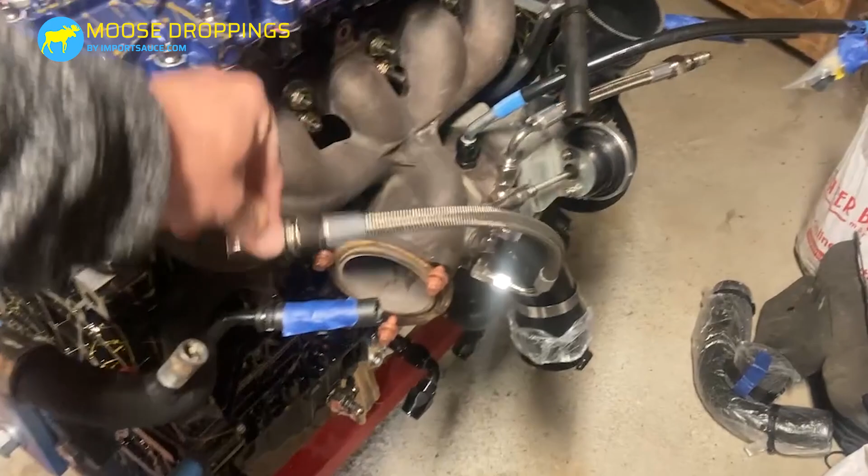So the next thing we're going to move on to is all of the lines. There are 4 of them. We have 2 coolant lines, you'll see those in stainless steel braided. One goes here, the other loops around to the hard pipe. We had cut all the hoses to length from what we had taken off. The bend here may be a little weird, so we may have to loosen and bring this out a little more. Or in the case of a few other things, we just go to the parts store and tell them the shape, and they let us look around on the wall and pull stuff down.

The Elevate soft oil return line will bend down and go into right there. And then the breather from the front pipe that loops all the way around to the intake manifold is going to go right here onto this check valve. So we'll play with those hoses, we may end up shortening or doing a few things, but essentially we're going to get that snugged up, and that will pretty much take care of that exhaust manifold assembly.

All done. That took a little longer than we expected. It was less than 2 hours. Should have been about 10 minutes.

Coolant return, fine, a lot of play on there. We just trimmed this hose down so it had a nice even flow. The other one wasn't too bad, we just loosened up this fitting and cocked it out a little bit more so it had a nice curve. Trimmed that hose and you can see a nice even curve on that.

Beautiful. The breather that goes up front, same thing, trimmed it down, it seats perfectly on there. Everything's there, no kinks, and it's out of the way.

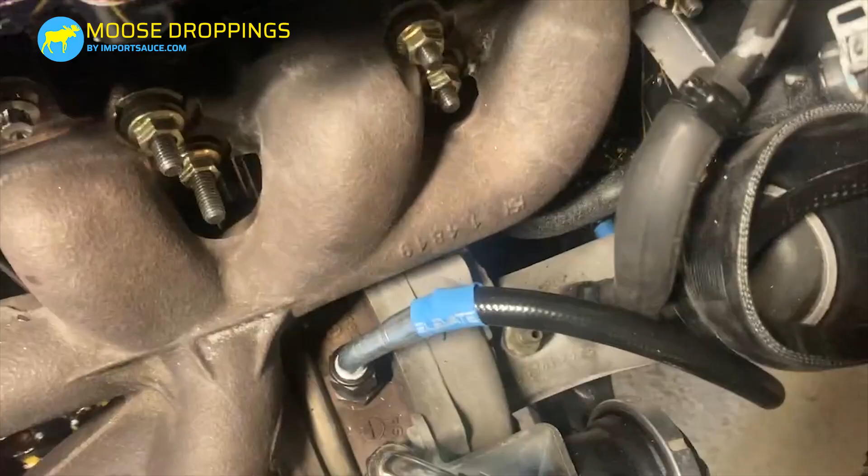The one we had trouble with was the Elevate hose. In hindsight, we should have had it attached to the block way sooner before all this stuff got in the way. Very difficult. We ended up taking this one off, coming down there, doing straight pliers, and we were able to get that all snugged up.

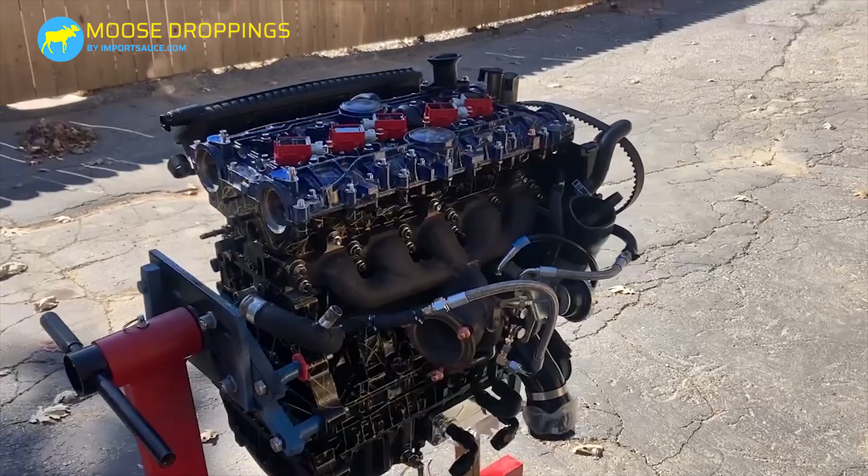So next thing is going to be doing a complete video on timing. Set our timing out here, do our last minute check with actually some room to walk around this thing. And we went ahead and put our coil packs on. We have a separate video, but we're waiting for the brand new Elevate 12-point copper engine grounding timing cover set. And that is on, check out that video, it also includes the engine bay grounding kit, which we just installed.

So we're gonna get some tools out here and start showing you some timing.

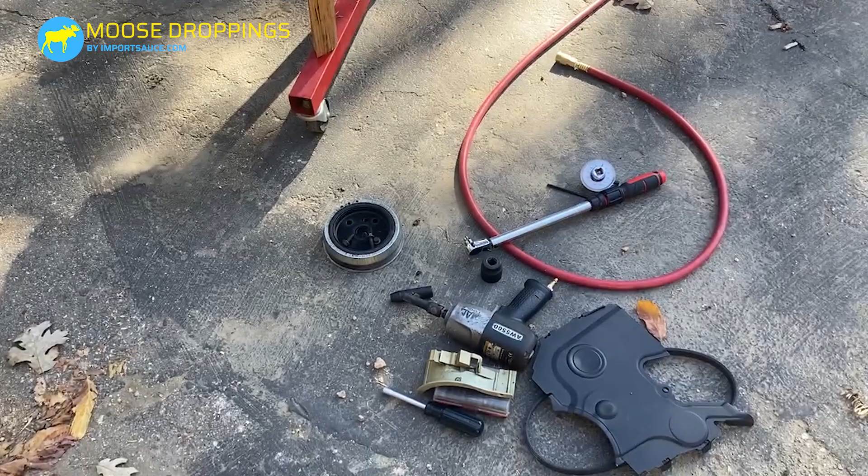We're back. Got a little too cold last night, but we're at a nice 55 degrees here, so just got to button up the last few things. We're going to go ahead and put the crank pulley on. It only goes on one way because you see this extra guide slot, which will be for this guy. The 10 millimeters here are 25 Newton meters and then 60 degrees. So we'll go ahead and take care of that.

Crank pulley nut, it's already on there, 30 millimeter, tight all the way, air tool is the torque spec. We're going with that. Okay, that's all suited up.

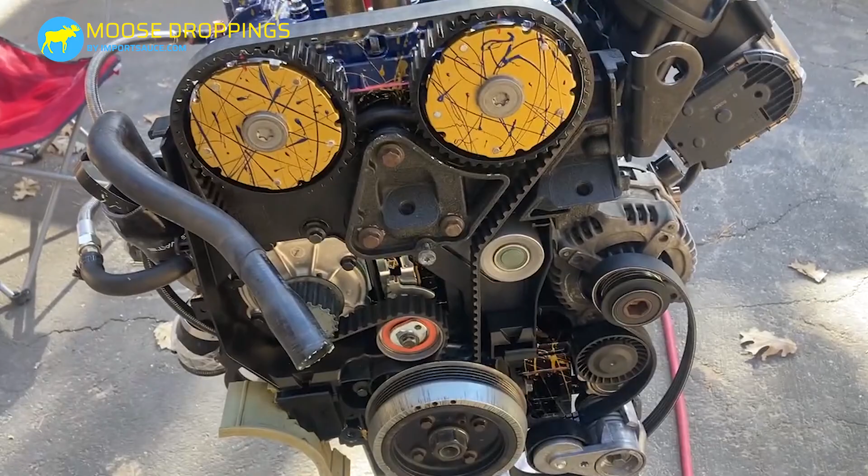Next is a timing cover thingy. So right here we have a T27, we're gonna pull that off, and then the bottom, see here and here corner, are gonna slide into there and there. And then there's little guys on each side, which will clamp around those little notches there.

It's all buttoned up, and we figured we might as well put the motor mount bracket to engine on first. That way when we drop it in, it's ready to go. But this guy's done, he is ready to get onto this guy and make his journey down to the car.

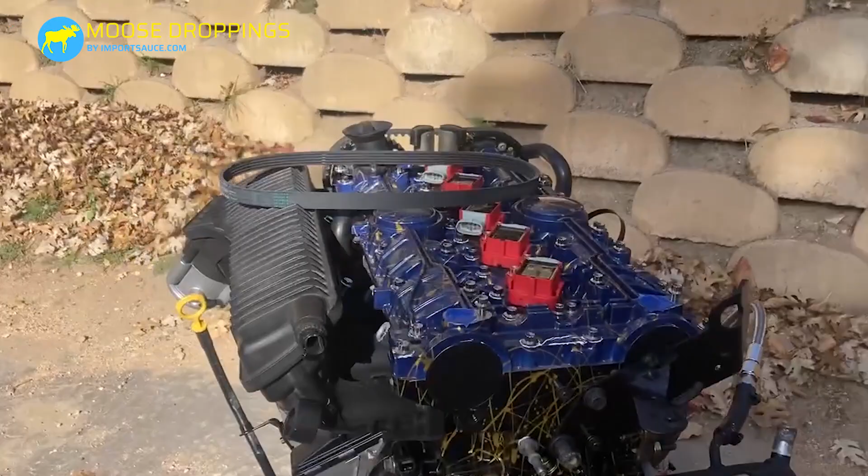So next videos coming up will be mating and doing flywheel, pressure plate, transmission mounting, starter install. I think those are kind of the big ones, and then we'll dust off the picker and see if we can drop the guy in.